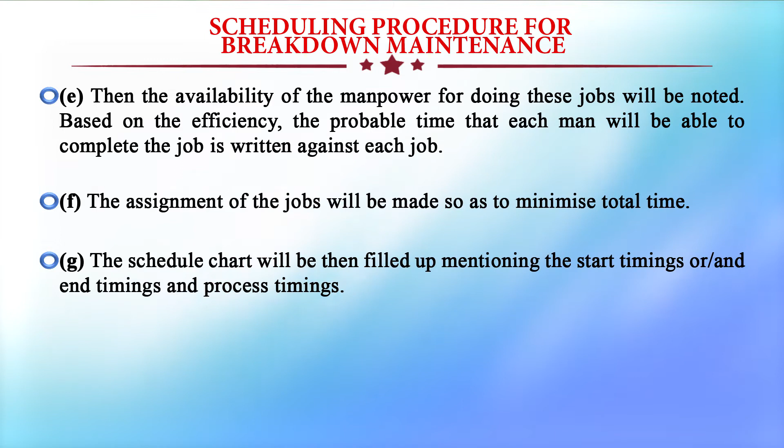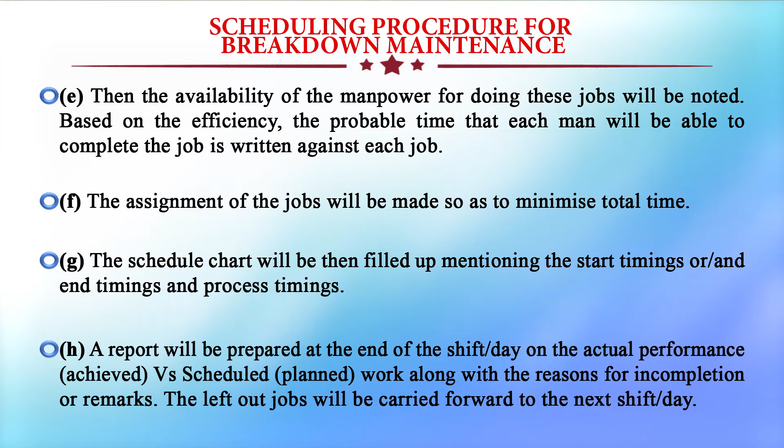The schedule chart will then be filled up mentioning the start timings, end timings and process timings. So, in the schedule chart there are three timings: the starting time of a repair, the end time of a repair, and the total process timing, which will be noted down on the schedule chart. A report will be prepared at the end of the shift or the day on the actual performance achieved versus scheduled or planned work, along with the reasons for incompletion or remarks. The left out jobs will be carried forward to the next shift or next day.

Then, scheduling procedure for preventive maintenance. So, now we have learned about the scheduling procedure for breakdown maintenance. Now, we will learn about the scheduling procedure for preventive maintenance. As we know, preventive maintenance is adopted in numerous ways in industries, of which the most common in use are planned maintenance, scheduled maintenance, maintenance prevention, etc.

The scheduling depends on the preventive maintenance policy adopted by the organization or the company. The importance goes to uninterrupted production in scheduled maintenance, while the priority rule is based on the frequency of failures or rate of failures, mean time between failures in planned maintenance, and the age life of the equipment in maintenance prevention, etc. The general guidelines for the scheduling procedure of preventive maintenance are as under.

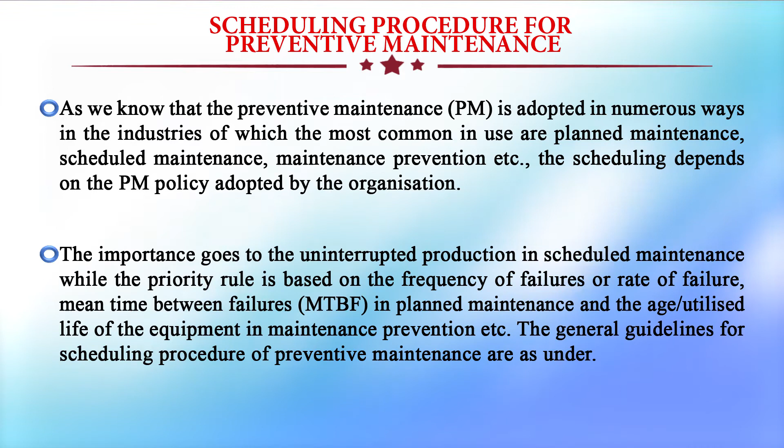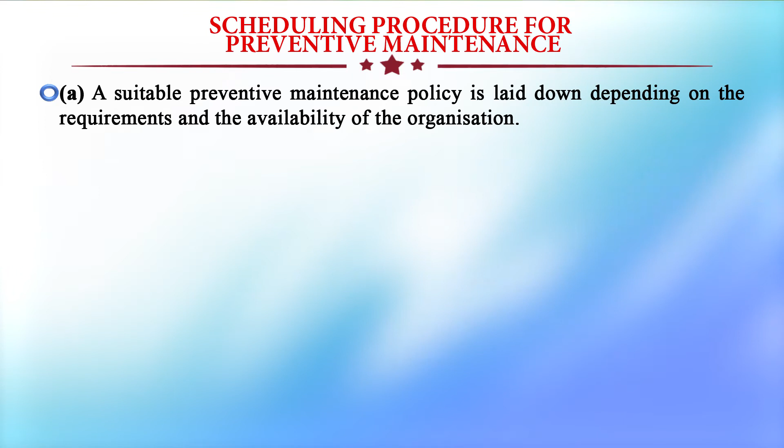A suitable preventive maintenance policy is laid down depending upon the requirements and availability of the organization or the people. Understand the priority rule that predominates in the preventive maintenance policy adopted. List out all the machines and identify the machines that require regular or preventive maintenance. Determine the frequency of preventive maintenance on each machine.

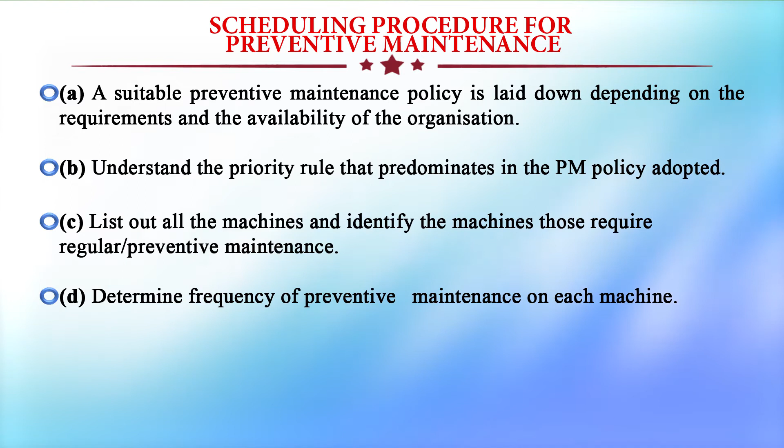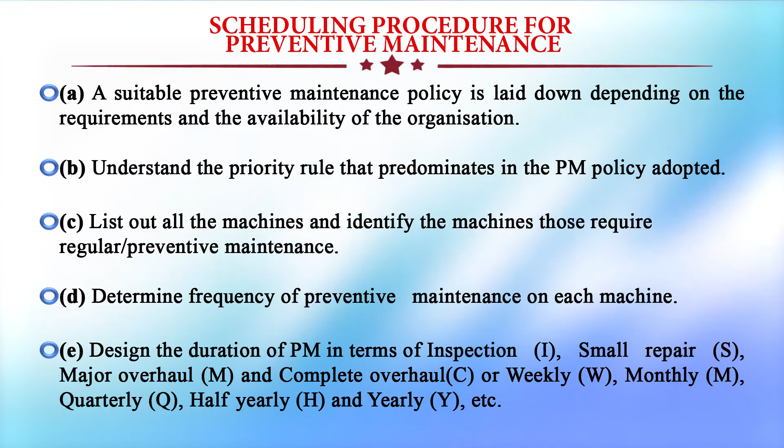Design the duration of preventive maintenance in terms of inspection, small repairs, major overhauls and complete overhauls, or weekly, monthly, quarterly, half yearly and yearly, etc. So, design the duration of preventive maintenance.

So, one has to design the preventive maintenance process; these are operations like inspection, smaller repair, major overhaul and complete overhaul. And it will be done weekly, monthly, quarterly, half yearly or yearly. So, that should be designed first, then it should be implemented. The preventive maintenance should be implemented.

So, allocate this ISMC or WMQHY or any other suitable set to various days in the maintenance horizon, the period for which the maintenance policy is observed, such that jobs are distributed evenly and uniformly. Correlate with the production schedules and remove the overlaps if any. So, it has to be correlated with the production schedules.

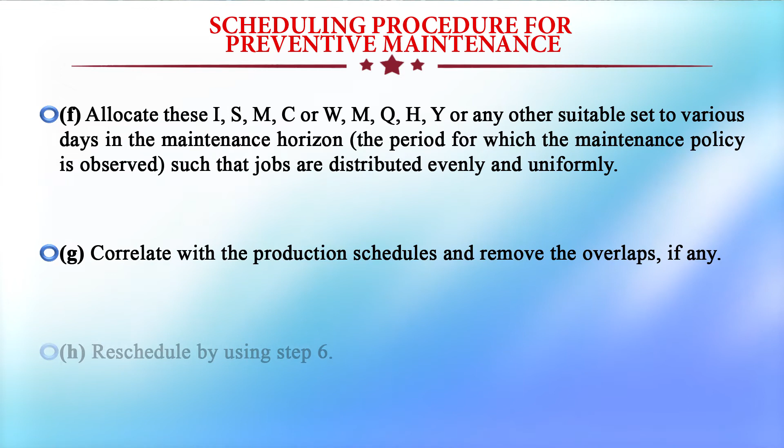Maintenance schedule and production schedule should be correlated to avoid the overlaps if any, and reschedule by using step 6. So, again the rescheduling of the machine, once it is completed, then again reschedule according to the requirement. Then comes check sheets. What are the check sheets?

Every machine has got its checkpoints where the maintenance personnel have to concentrate. These points are usually given by the original equipment manufacturer or may be suitably selected. A thorough study is to be made before laying down the norms for checking these points.

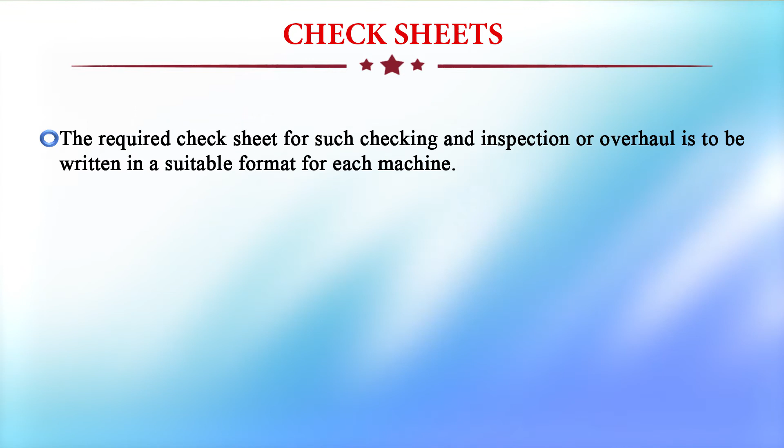The required check sheets for such checking and inspection or overhauls are to be written in a suitable format for each machine. So, each machine should have check sheets, so that we can find out the information about the machine failure or machine timings. For example, a lathe machine has got various points like lubrication points, cleaning points, performance check parameters, etc. These are to be listed out.

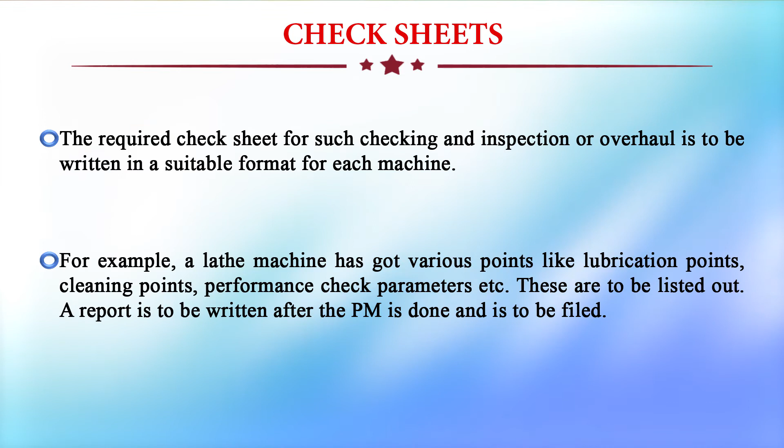A report is to be written after the preventive maintenance is done and is to be filed. So, the check sheets are very much important. So, what are the preventive maintenance activities to be carried out for a particular machine? If it is a lathe machine or milling machine, what type of lubrication is required, when the lubrication has to be carried out, and then cleaning points, performance check parameters, etc. can be written on that check sheet, so that accordingly the preventive maintenance can be carried out.

Scheduling formats. A suitable format may be designed so as to accommodate all the machines and their preventive maintenance schedules. These are to be prepared at the beginning of the year for a certain period, usually 1 year, called preventive maintenance horizon, and these schedules are to be strictly adhered to. So, scheduling formats have to be prepared, which have to be followed. The format has to be approved by the top management.

The schedule formats are to be approved by the top management, and the copies of the approved schedule formats are to be sent to each production department and to all the persons concerned, so as to keep those machines available and to make necessary arrangements for the plant engineering department in those schedules.

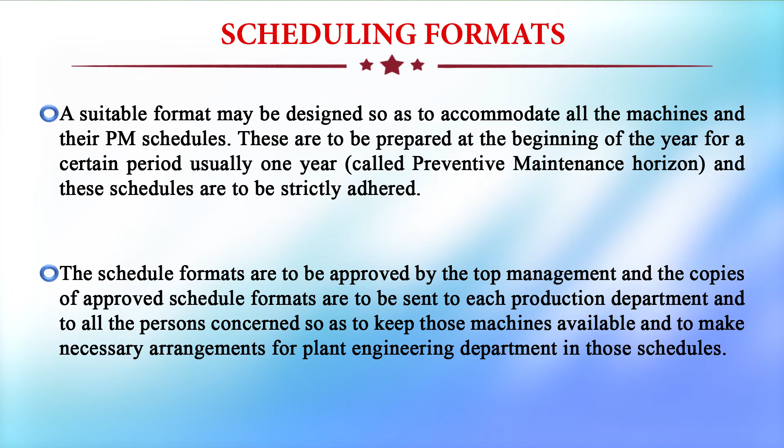So, because of developing these schedule formats, according to the schedules, the production people have to provide those machines for the preventive maintenance purpose. So, at that time it has to be available. Suppose it is having the load for production, even then they have to spare that machine for the preventive maintenance purpose. So, that is the use of scheduling formats and check sheets. The results are to be recorded after every preventive maintenance activity.

The schedule format duly approved by the top management is reframed in a larger size and is treated as the maintenance master schedule. So, once that format is filled up, it is called the maintenance master schedule. For the horizon, the MMS is regarded as the regulatory and reference document. Any deviation or discrepancy reported could be solved by using this MMS only. So, this maintenance master schedule will be utilized further also.

After completion of each preventive activity, the respective cell in MMS is marked or filled with a green color. If any major problem is noticed during preventive maintenance, it will be filled with a red color. One may choose different colors for indication of such information about various problems which occur during preventive maintenance activity. The design time and the actual time may also be indicated. It will be utilized for further analysis and as guidelines for the preparation of the MMS of the next year.